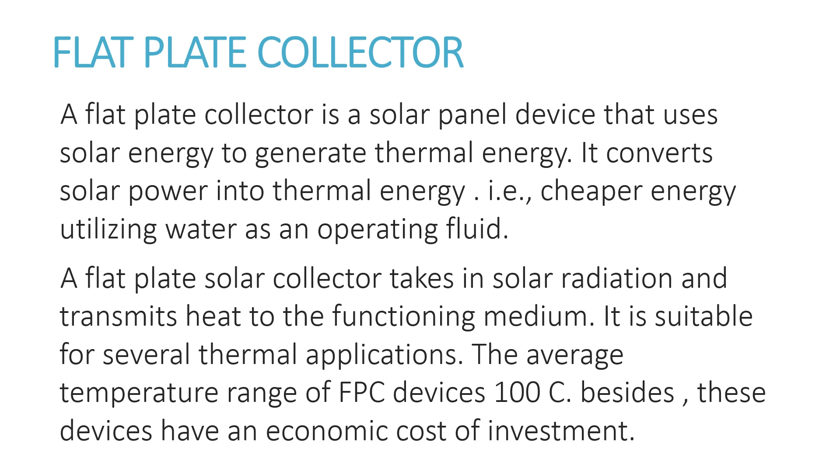Principle of the flat plate collector. The working of the flat plate collector involves the transfer of heat or thermal energy. The operating medium exchanges heat from the sun's rays. The heat absorbing plate of the collector is exposed to sunlight. As the sun rays hit the flat plate surface, a portion of the energy is transformed into heat. This leads to a rise in the temperature of the flat plate solar collector.

When a fluid is passed inside the collector, the temperature of the fluid increases as the heat from the absorbing plate is transmitted to the fluid. Eventually, the fluid transmits the thermal energy from collectors to the functioning energy systems for different uses. It works on the principles of the first and second law of thermodynamics.

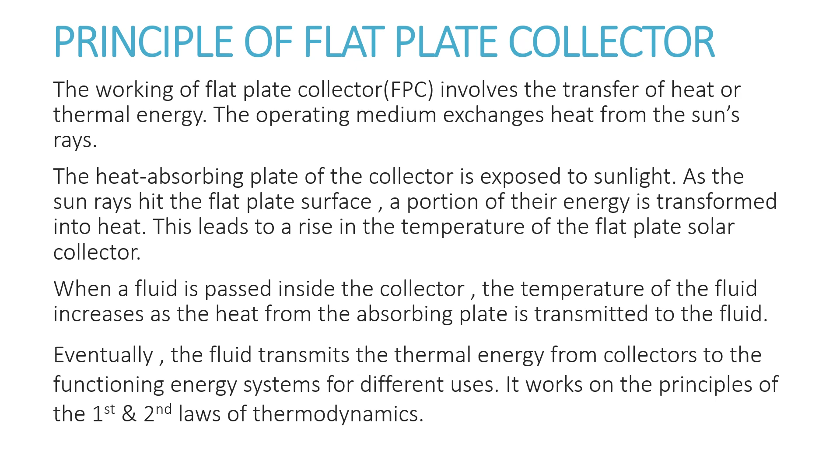Components of the FPC. Here are the typical components of a flat plate collector. First is the absorbing plate. It is a component inside the collector that traps solar radiation. The absorbing plate converts the solar power into thermal power. It is a dark plate generally made of copper foil.

Second, tubes or passages. The absorbing plate in a flat plate collector has a grid of conduits. These are tubes or passages for circulation of the heat transfer fluid. It aids in conducting the working fluid from the inlet to the outlet.

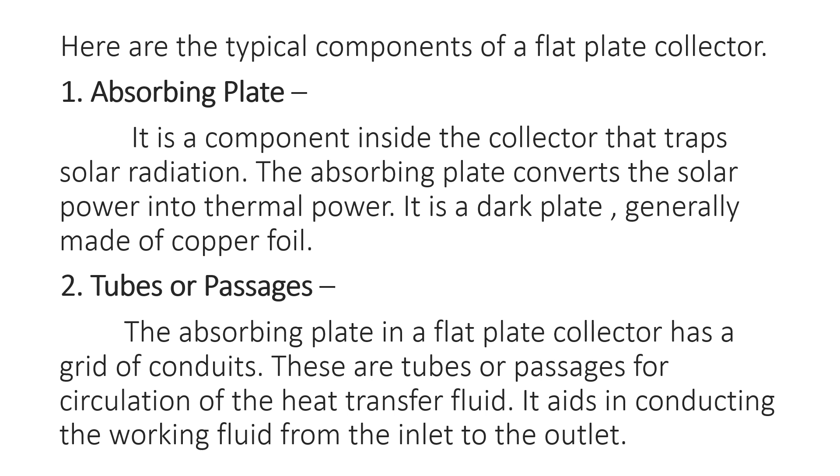Third is the insulation and glazing cover. Insulation minimizes heat loss from the absorbing plate. It is present on the sides and back of the plate collector. The insulation is typically made up of synthetic foam sheets. Fourth is the casing or container. The casing acts as a resting surface or closure for the components of the flat plate solar collector. It is made up of aluminium and holds all elements in place.

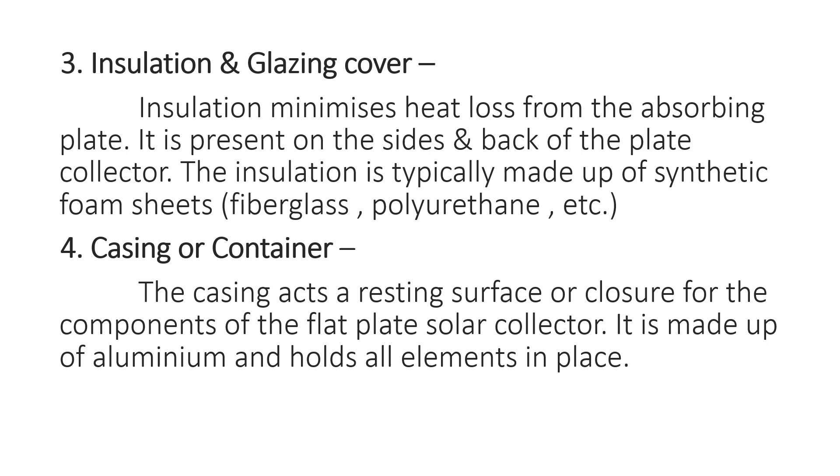Types of FPC. We can categorize flat plate collector devices on two main grounds. First is based on glaze. Glazed panels. Glazed or glazing panels are insulated panels that embrace a glazed covering. They block infrared radiation and provide insulation to the solar plate. Under the glazing, there is an absorbent in which the working fluid flows. Glazed FPCs are commonly used in household water heating installations.

Unglazed panels. These flat plate collector devices are not glazed. Unglazed panels are usually utilized for swimming pool heating installations. They are inexpensive but less popular. The temperature range is less than 30 degrees.

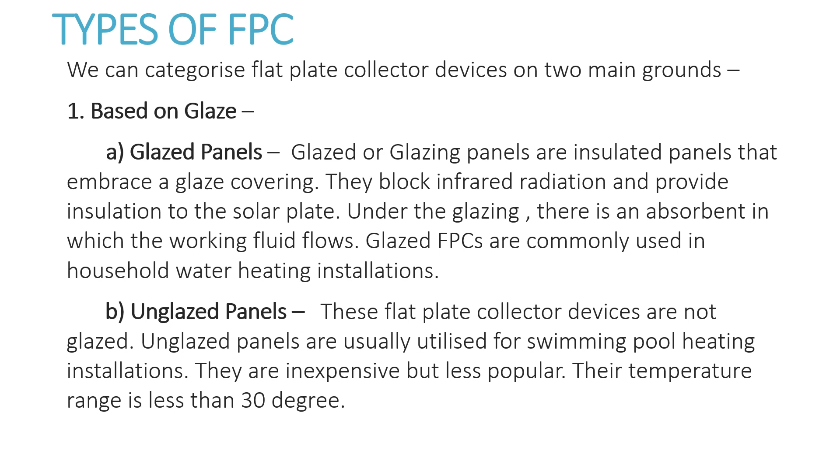Second, based on configuration. Parallel absorbing plate. In a parallel flat plate collector, the heat can be dispersed with a larger volume of circulating fluid via the branches present inside. It can be installed in both horizontal and vertical orientations. Series absorbing plate. Such FPCs include a sole continuous circuit. It has heat jump and a lesser volume of circulating fluid.

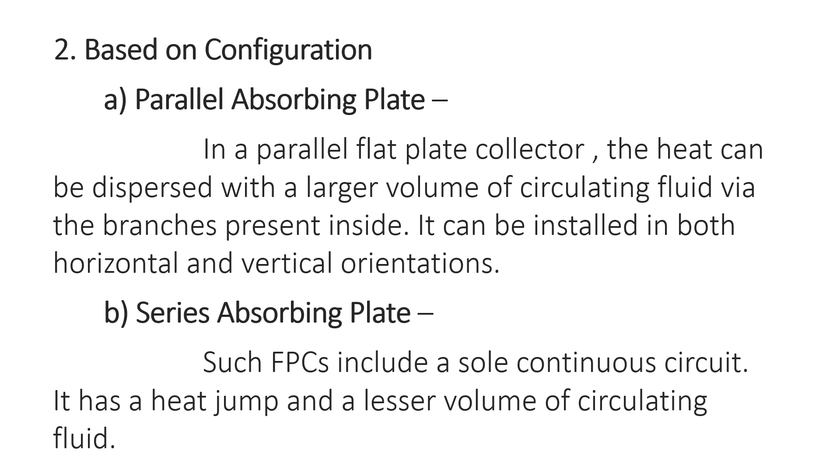Advantages. This is a non-pollution type system. In this, there are many flat plate collectors that are firmly fixed to a mounting structure. This can collect the direct and diffuse solar radiations. The power we use in this is renewable energy. Construction is easy. More energy can be absorbed at low temperatures.

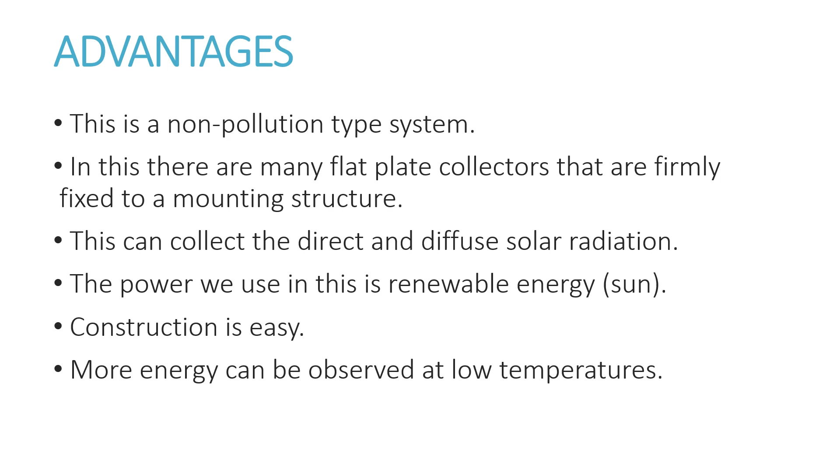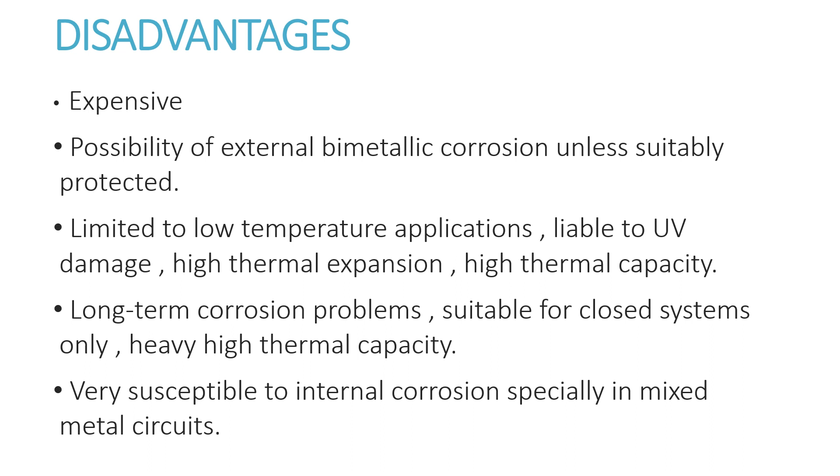Disadvantages. Expensive, possibility of external bimetallic corrosion unless suitably protected, limited to low temperature applications, liable to UV damage, high thermal expansion, high thermal capacity, long-term corrosion problems, suitable for closed systems only, heavy, high thermal capacity, very susceptible to internal corrosion especially in mixed metal circuits.

Conclusion. A flat plate collector is a device acting as a heat exchanger. It converts solar power into thermal energy. It can gather solar energy and use it to heat water in the house for bathing, washing, etc. Also, it can be used to heat hot tubs and swimming pools. The FPCs prove to be more feasible than other water heating systems due to their economical price, simple design, and easy installation. They greatly help to save on energy bills.